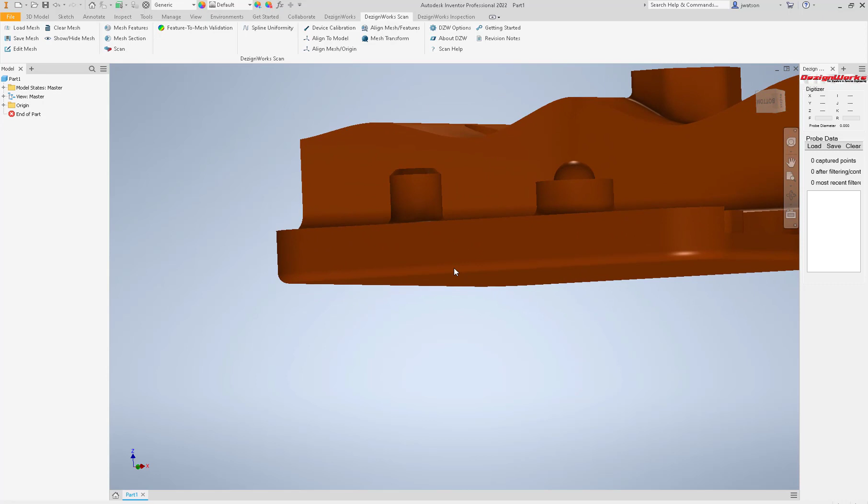So the first thing you're going to notice is this part has fillets, chamfers, all kinds of things on this part that normally makes the person's life miserable trying to create this with other products. They'll tell you to go back and just edit everything in the tree, add a plane. Well, our guys in our service bureau didn't like that, and neither did our customers, so we've added some new great tools.

So to get started, we're not going to talk about moving the origin or anything yet. We're just going to work on building a feature from this. To build this, you're going to do it the same way you would do it using Inventor sketch tools: you pick a plane, define a profile, extrude it, and so forth. We're going to do the same thing.

So we're going to go into Mesh Features. If this is the first time you've used your system, you may need to resize this, it may look something like this. So go ahead and resize this to cover your screen. You do not want to be utilizing Inventor underneath and DesignWorks at the same time.

You'll notice you can move this with the 3D mouse or your mouse. The middle button lets you rotate, left and right buttons on the mouse let you select. We highly suggest the 3Dconnexion SpaceMouse, it lets you turn and rotate it.

On the left side, you'll have a menu that you can put wherever you want. We just like it on the left, but you can put it anywhere. You'll notice at the beginning some tools, they look and feel like Inventor: plane, mid-plane, lofts. These are the kind of items you're going to create.

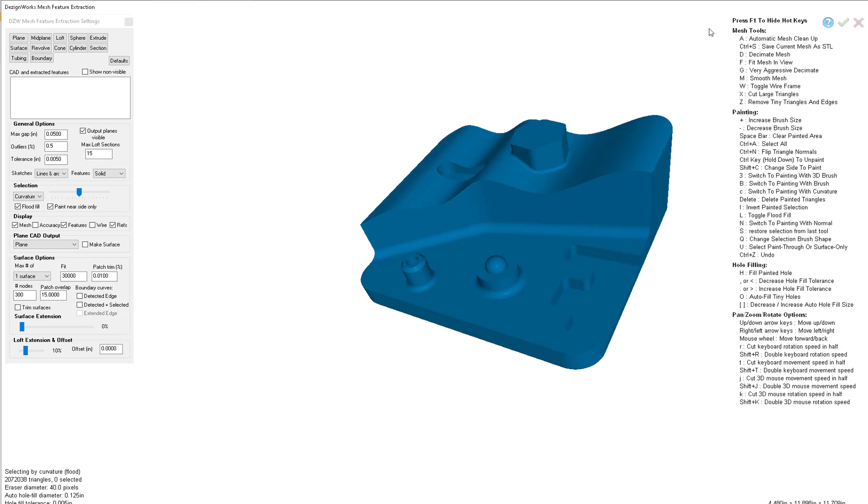So to get started, we want to constrain this. You'll see a lot of products out there just paint on the meshes and build it, nothing's constrained, horizontal, vertical, then you get in a tree and you have all of these nightmares. So let's first go back to the normal painting.

This slider controls how much it's going to paint. Normally you want to keep it somewhere in the middle.

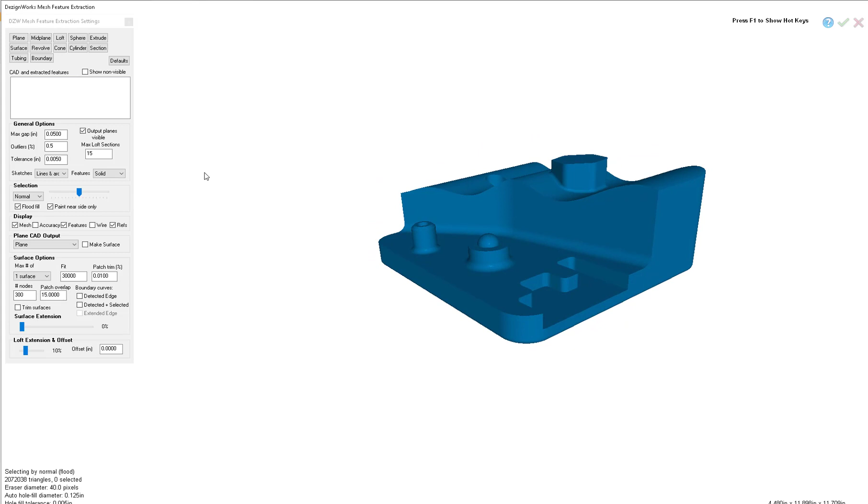So we want to define a plane on the bottom of this. I'm going to move the mouse over here, left click on it. And because the slider is about in the middle, it selected all of it. Notice it got right about to the horizon line. You don't want to paint over into that chamfer, it can confuse it. We're going to create a plane there.

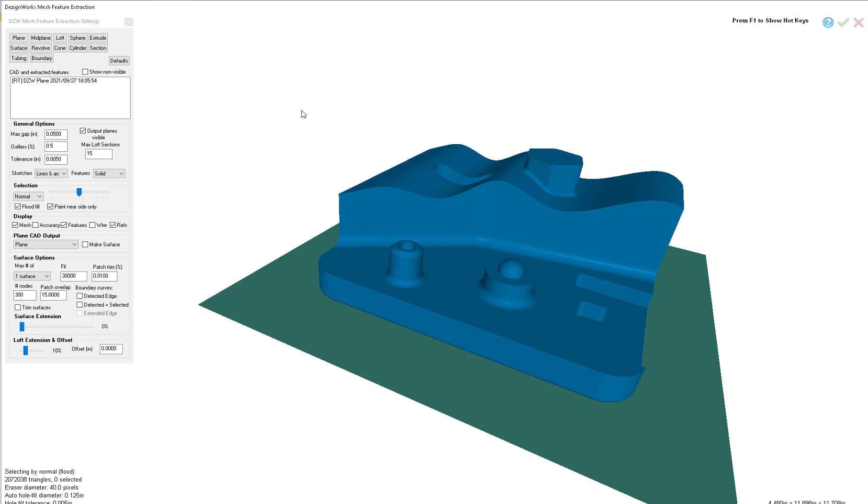Now there's another option for a plane to make a surface. We don't want that, so we're going to simply say make a plane. You'll notice in the tree, as you build, it's going to add things, and this little pop-up tells you what affects it. So now we have that plane.

Like you were in Inventor, we have to define this profile. So we're going to leave it on normal, kind of like left click. And if you want to drag it, hold left click and drag like this.

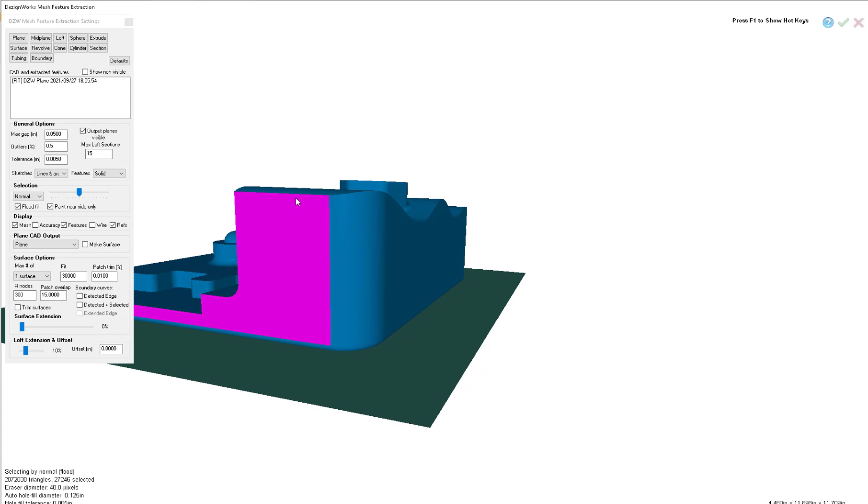Now for the extrude, it does need to be continuous, but it doesn't have to be painted the whole height. By painting this the whole height, this tells the extrude how high to go, but that can also be modified in our new extrude tool.

But let's pretend there was a casting and there were some irregularities in here. You could go to B for brush and use either the round, or hit the plus sign and make it bigger, negative makes it smaller. Or the Q key makes it into a cube.

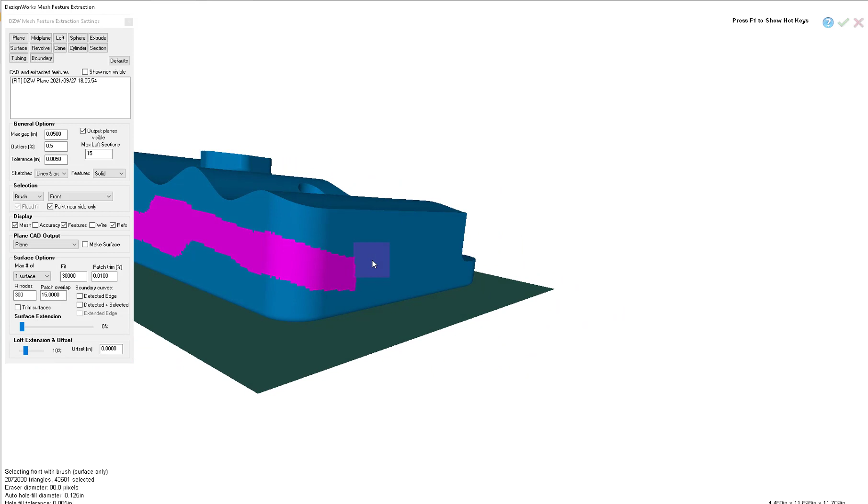Now you can paint on the front, back, and both. Normally, if you're learning, I'd say leave it on front. But let's say it had a bunch of impurities in this, you want to go around it. Say it was real jagged there, you can switch your painting style. And then when you got over here, you'd say, hey, this is all good. You could go back to N for normal, or pick it here, and go like this. So those painting options are very handy, because not every part you get is perfect.

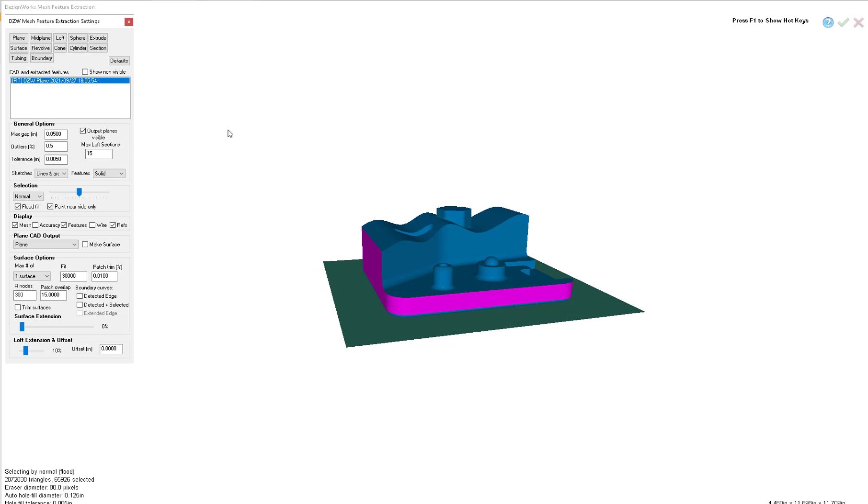So now that we have our sketch profile painted, we're going to select this constraint. We want this extrude to be perpendicular to the painted sides. So we're going to review, it's a solid. We've constrained it. Now currently, because it's painted to here, this is how high it will go.

But what if you need it to go a little bit higher when that loft kicks in? You could actually go back to like the brush, that's one of the easiest ways. B for brush, you might want to make it a little smaller. You could select, I want to go all the way to here.

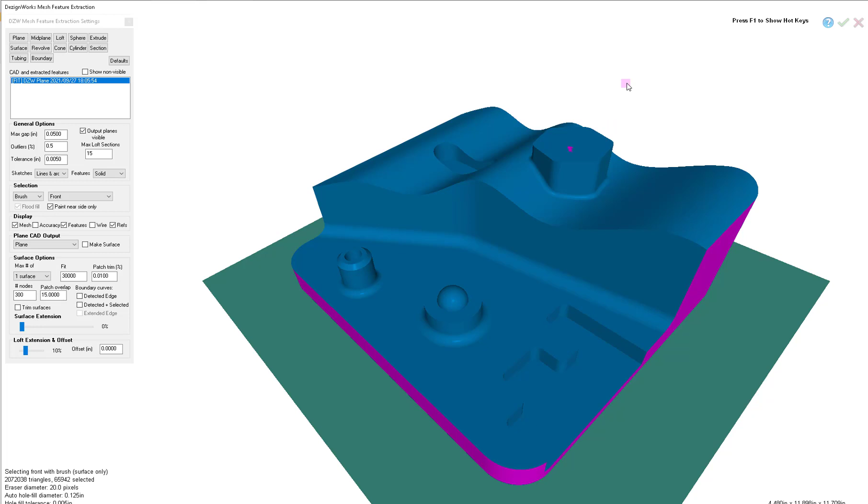Okay? This is something no other product in the world does. They make you edit it once you go back to the Inventor tree, and they make you make planes and edit up the surface and all this other stuff.

So now we can tell it, we have a plane constrained. We picked our top, and we want a solid. We're going to simply hit extrude. So it's going to process the data, and a new window is going to open up.

This is brand new for 2022, the in-process extrude window. This can be moved around wherever you want it. Now currently when it's up, you can't rotate the part, but you can make it smaller or bigger.

So currently it's saying, here's all your gap settings, lines and arcs. It allows you to in-process change this. Now look at this model, we assumed it was straight. During the integration it says it's got a draft. We don't want a draft.

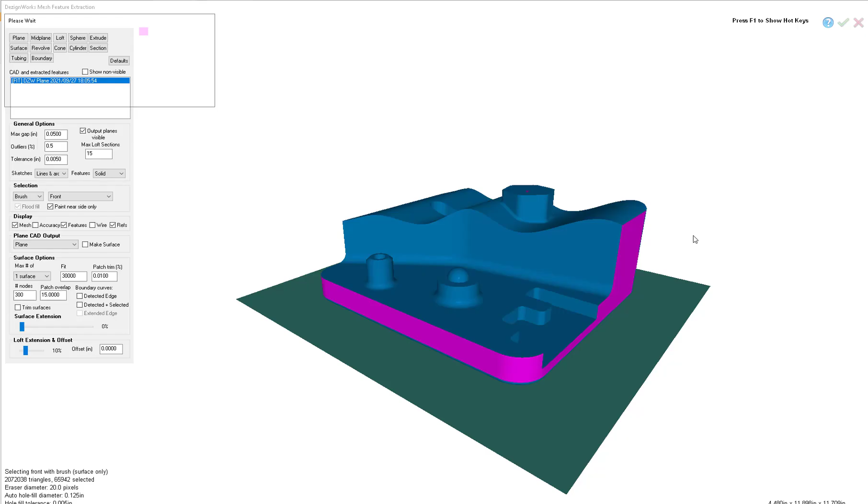Here's where all the other products make you go back to the tree and edit it. The red tells you the bottom, this tells you the top. And we can go ahead and say recompute. It's going to recompute because we told it we want a different draft. If you didn't want a different draft or anything, then you could just say accept.

But I changed the draft, it's now 0 and the sketch is closed. So this is a really great tool, it shows you 4 views and you can change the start point, end point, whatever. And we'll say accept.

So notice it shows you a preview. If you want, you turn on the accuracy analyzer, it'll check where we painted it. So this is holding really, really good. If we let that draft on there, it would have shown red. Now that the accuracy analyzer is on, you can check the whole part.

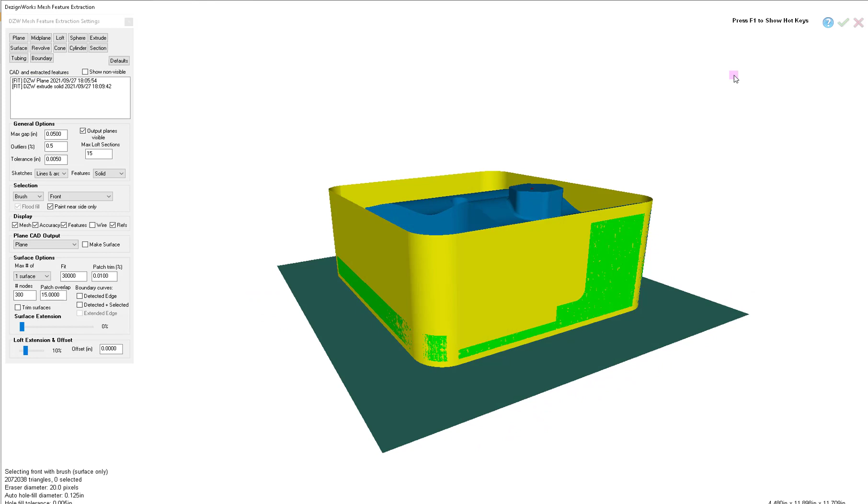I recommend turning this on and off. Now we'll hit the green checkbox. It'll write this back to Inventor, and you'll notice in the tree you have the extrude and the sketch.

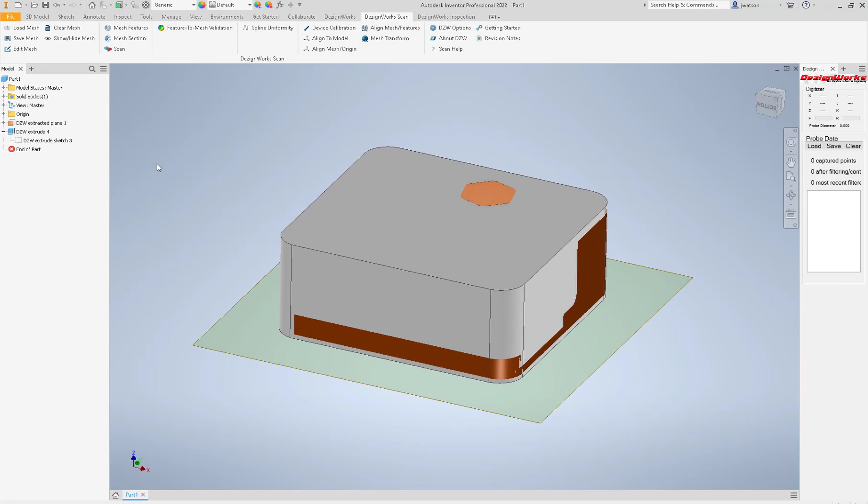The reason for that new extrude window is that all the other players out there make you pick a plane, pick up the surface, edit it. We don't want to do that. So let's say edit sketch - nothing's constrained, so you can come in here and actually change your model.

We could do a DezignWorks scan, show hide the mesh. Here's all your data - look how nice the lines and arcs are. With DezignWorks 2022, we spent a lot of time improving this.

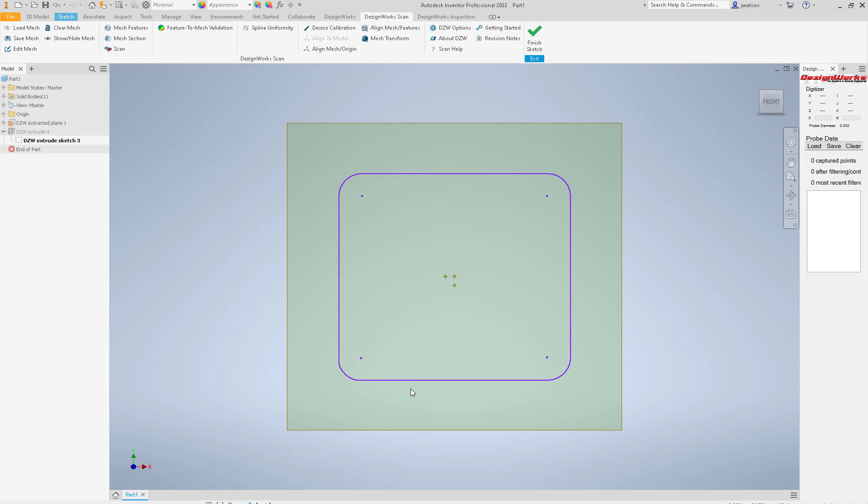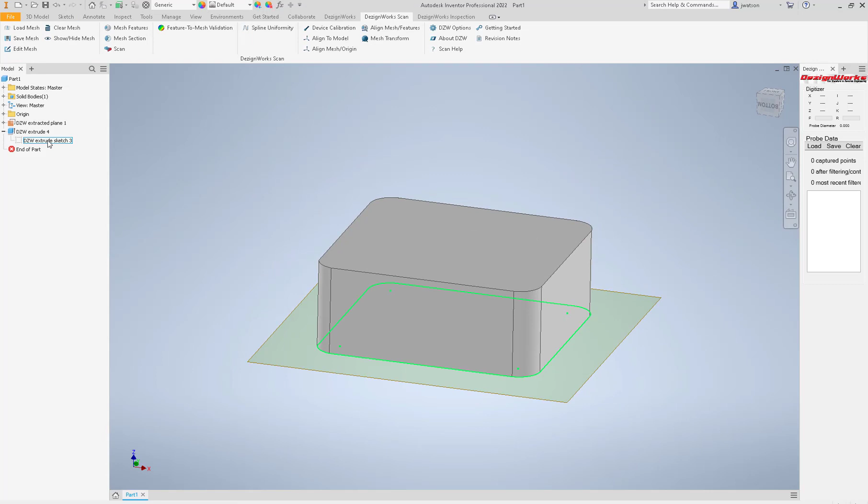All the other players out there make you go sketch on top of it - it's painful. So you can go up to 3D model and just go ahead up here now, or back to the sketch and dimension all this - your lines or arcs, whatever - or if you like it, just hit the check mark.

You can adjust anything in the tree, the height, sketch, whatever you want. Let's go back and start cutting away this. Let's go back into Mesh Features, and let's go ahead and do this wavy top.

Let's leave it on, it's actually on brush. This is what would happen if it was on brush - it'd go like this, so you can make it bigger. Do you really want to do that? It would take a lot of time to do this, and you'd probably bleed over the edges, which you don't want to do. The normal tool is really nice.

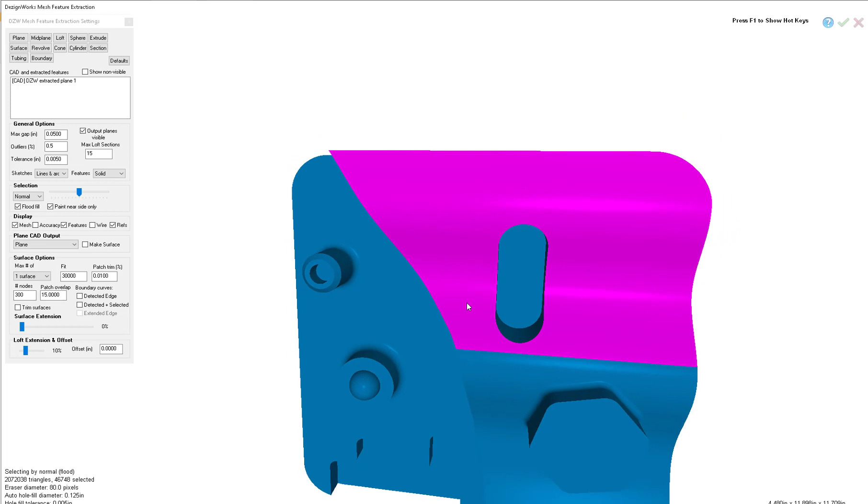You can hit normal or N. So watch what this does - it's adjusted here, it's about in the middle. It allows you to click and hold, so I'm holding on the left mouse button. It knows where like the horizon and edges are. So things you don't want to do is paint over the edge.

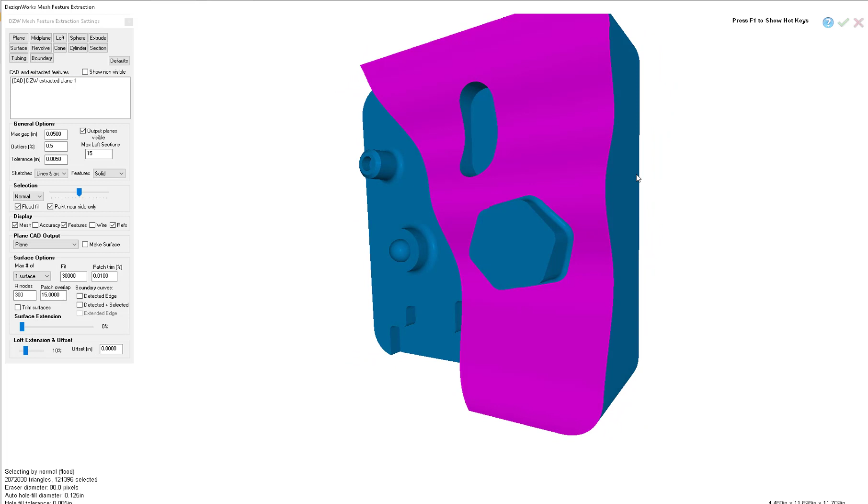Like here, you won't want to paint into that fillet. If you did, you can come back and erase it off with one of the other tools, but by using the normal tool it normally paints really nice. So here you can do some adjustment. If you want to make a plane here, and one of the cross sections running from right to left, you could do that, or make a plane here, going from top to bottom - whatever you want to do.

What controls this mainly is the loft. You can put as many cross sections as you want - by default it's set on 15. So let's just go ahead and say I want to do a loft.

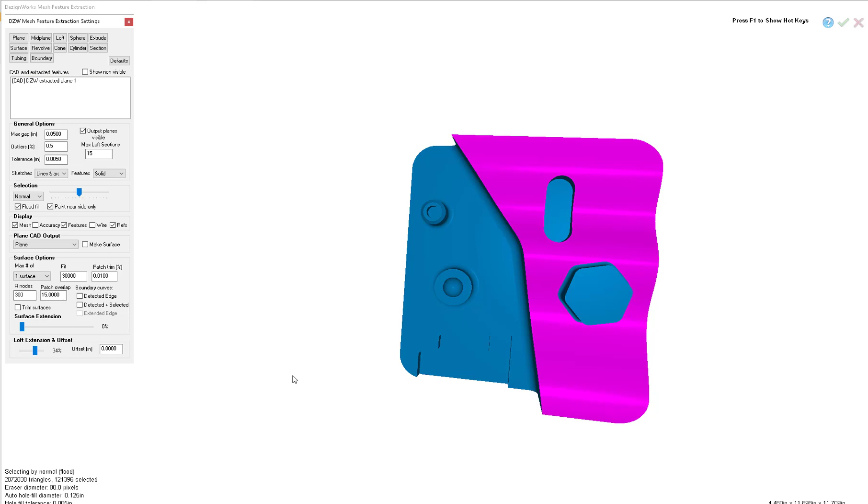Here's another issue - if we didn't extend this, we'd have to extend it in Inventor. So in DezignWorks under loft, we can extend this. Now it's doing the volume, so you don't have to put this up to 100%. You probably put it 25, 30, 40. It's looking at the volume of the part and saying, how far do you want to extend this loft?

Also new in 2022, you can offset that if you wanted to. So I'm going to take it up here, I don't know, 40%, and I'm going to leave that alone at 15 cross sections and say loft.

DezignWorks is very fast and efficient. It utilizes the GPU more than any other product on the market.

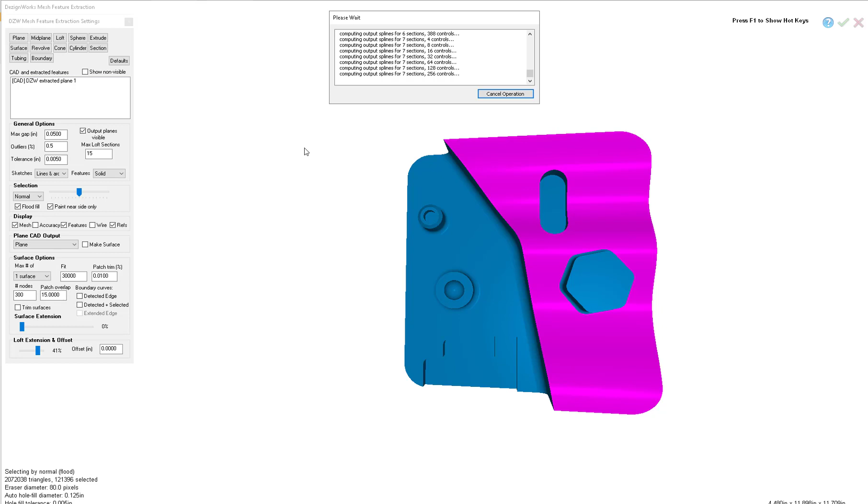If you need more cross sections, you can reload that mesh. We'll get into that a little bit later in some other training sessions, but since this is your first session, the key is not to overload you. So 15 sections should build this pretty accurate.

And we'll check with the accuracy analyzer. If you need less, use less. Some cases you might need 20, 25. Sometimes you have to run it and then just check it and see what you need. But most of our settings over here under general have been really beaten on and adapted to, so we didn't want you to have to come over here and constantly change these all the time. Nobody wants to work on flipping settings all over.

So this is about done, and all the cross sections are editable. No other product on the market lets you edit the lofts - they all show imported lines and you're stuck. We've really made this adapt to Autodesk Inventor so that you can edit almost any entity out there. So there it's done with the green checkbox.

There's your loft. Now there's many ways to trim this off. One of the easiest ways is to use the extrude tool.

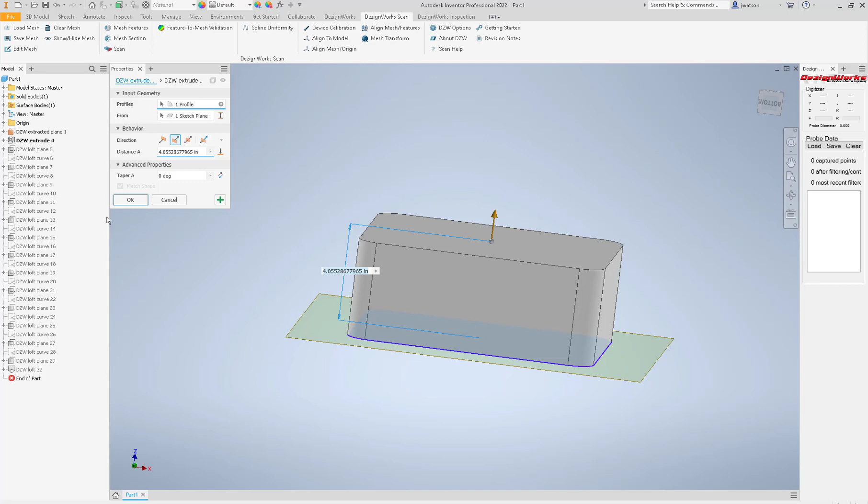So if you hit this and set edit feature, you want to realign this. In this case, you're like, what's wrong? Because it's parent-child, this is before all the loft. So if you do that, just hit cancel.

You can actually move this down to here, or do the loft first, however you want. Again, this all constrains to the parent-child relationships. Edit the feature.

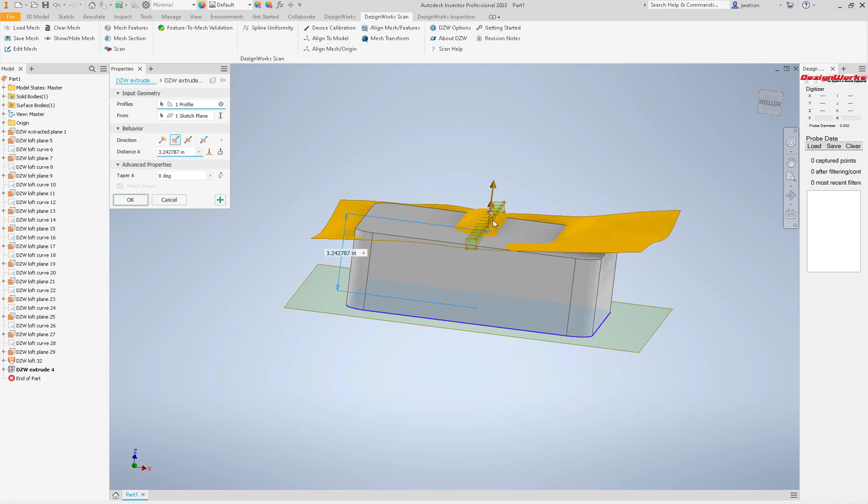Now with Inventor, you do have to pull this down below it. I don't know why, but you do. Then you can say To, and then pick this surface, it'll go up to it. If it's above it, it doesn't want to go down to it. Say OK. Then you can go ahead and actually hide this.

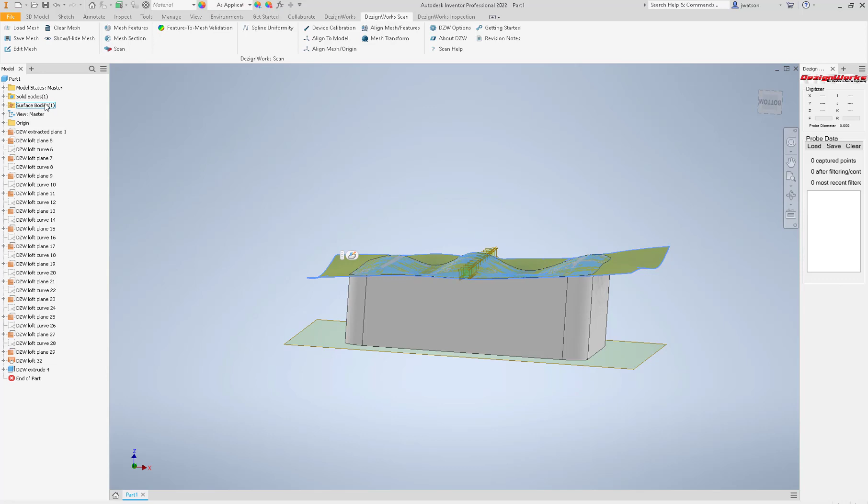So it would actually be up here in the surface body. You could hide it. You should occasionally save your part. File save. Let's go back and build some more features.

Don't forget about your thinking cap, the way you work in Inventor. You build everything the same way. Now, if you don't want to see all these references, you can turn them off.

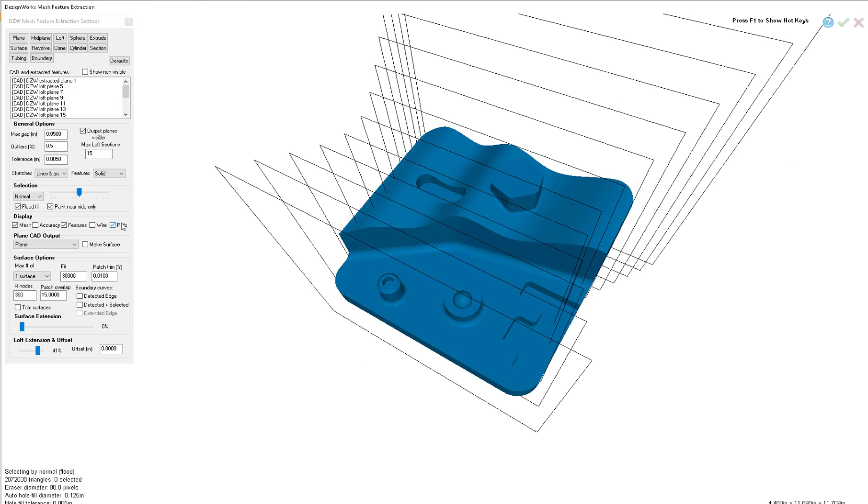Let's go ahead and cut this away from here. This is where the big problem comes for all of our competitors. They have trouble because it's fillet, and they have to pick a feature, and this is the fillet, and you got to edit the tree. That's why we have this new extrude tool.

So let's build a plane here. Again, we're on normal still. Build that plane. We want to constrain this, so let's paint on here.

But notice, it's painting here, it doesn't know how to get through the fillet. Oh, but it does. So when you get ready to build this, you can pick this plane. You'll see in the extrude window, it knows to start down here. So again, we save you all that time of saying, oh, it's short.

Go build another plane in the tree outside in Autodesk and do up to surface. We do it all for you here. So let's use the surface tool here, because we're actually going to delete this and just cut it off with Inventor. We're going to say surface extrude.

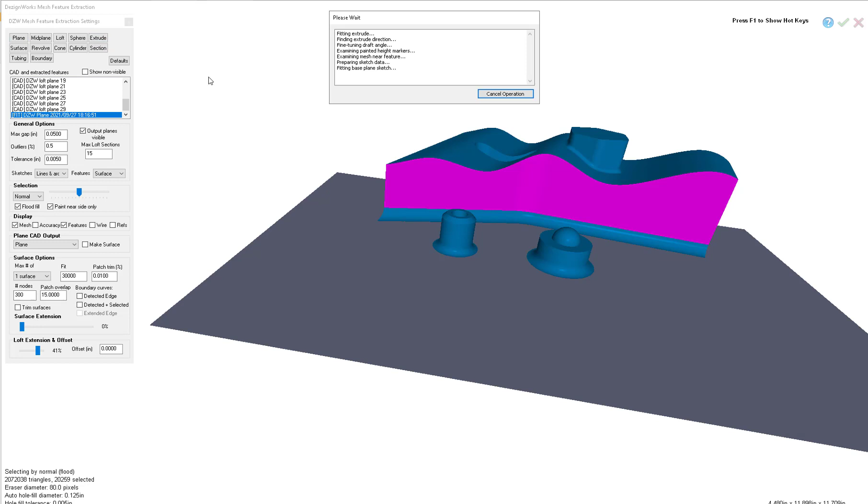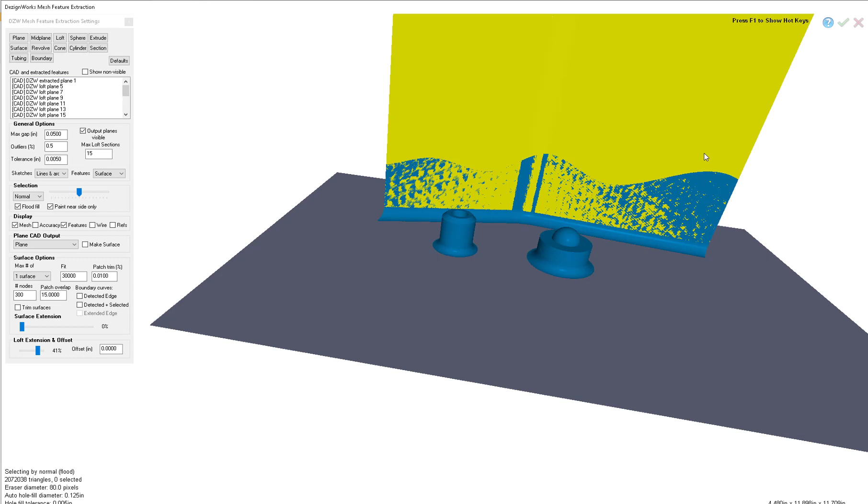It's not a closed profile, it's open. So here, what's really nice, this will actually start down there, but notice when we painted this, it might not be tall enough. So on the blue side, you could say through all and accept. It's going to make it taller. And then we'll go chop this off.

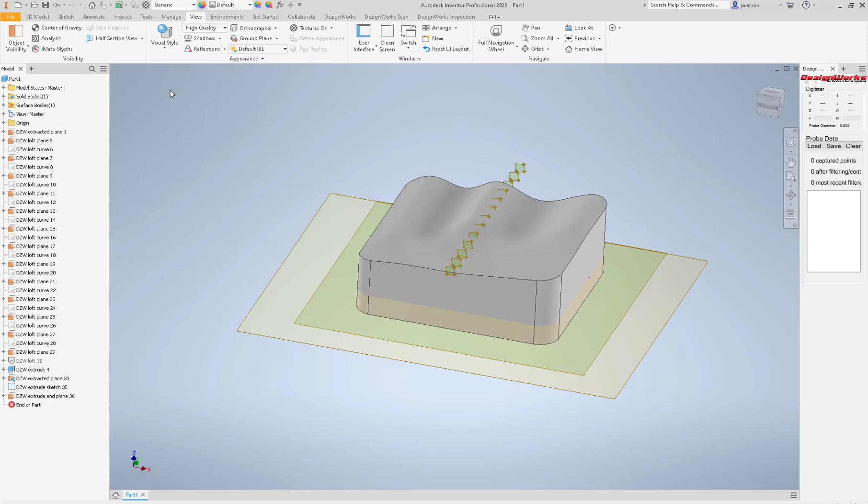So what it's saying is it's an open profile. Let's go take a look at it. We only need the surface of this. So in here, let's go to wireframe once. And we'll go to visual style. Let's go to wireframe, so in there's the sketch we need.

Sometimes they'll do that in Inventor because it's not a closed profile. So let's go in here once. Let's go to the sketch. So you'll see here's the plane, here's the sketch. Let's edit this sketch. We're going to make this closed and cut it off.

So go grab your normal tools and we'll trim it and close it. Right click, we'll go to trim, and we'll say extend this. So we'll extend this out to here.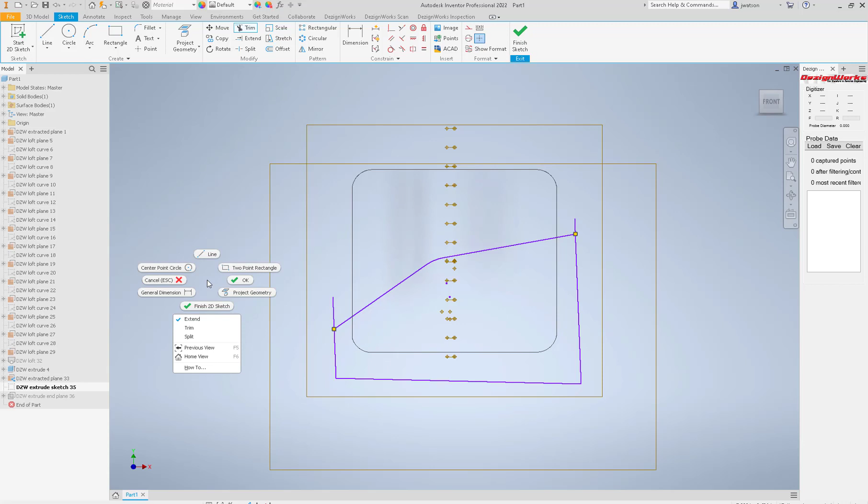Now we're going to turn our solid back on, our visual style. We'll do with the shaded with edges. Let's go ahead and cut that off. So we'll go up to the 3D model. We'll do an extrude.

Turn it so you can see a little bit. And you can drag this up or say through all, and we'll just say we want to do a cut. Let's save our part.

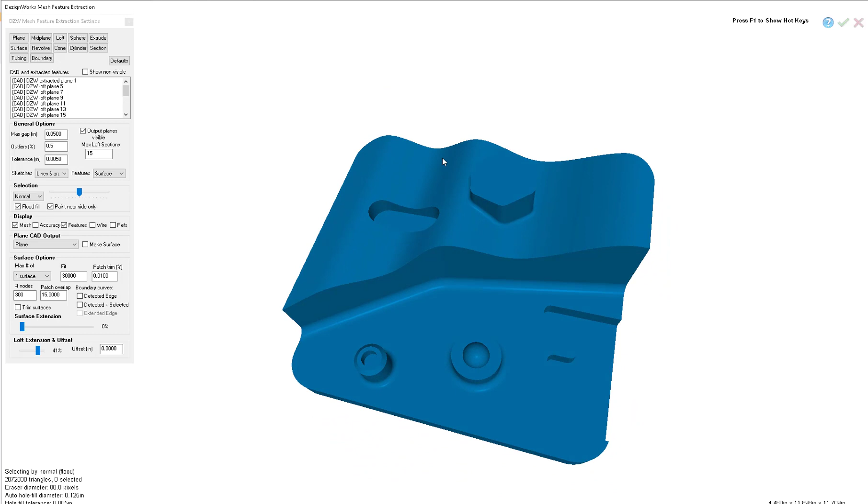Now let's go put some more features on this. Let's go back into the Pro Mesh and go into Mesh Features. So maybe you want to do this little boss up here. To ensure it's perpendicular, you could use the plane from the bottom, or you can use it as a reference.

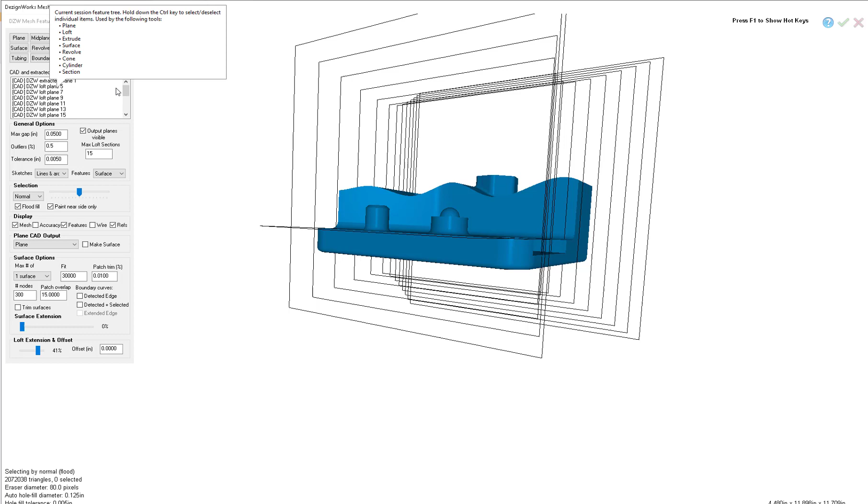So if you come and turn these on, the very first one we built was up in here. Okay, if you turn around, you see it's purple. So let's say you want the top plane you built normal to this.

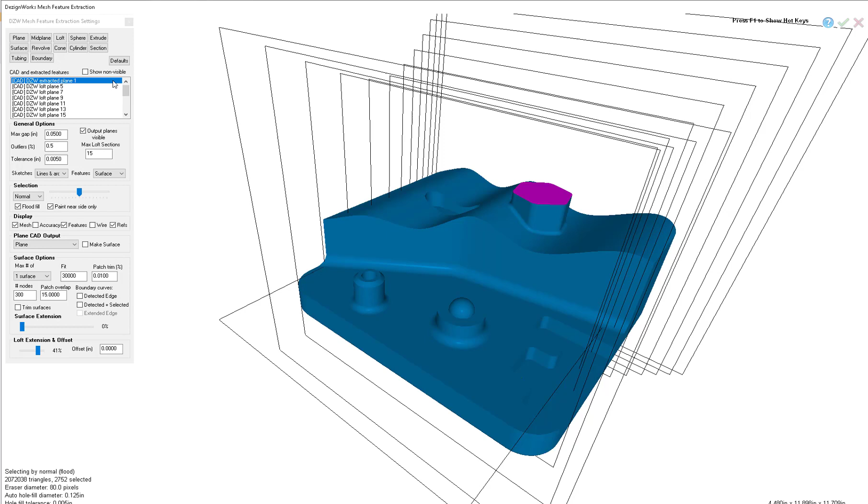So you can leave that highlighted. We could use normal, paint the top of this. When we say highlighted now, we can say let's build a plane that's going to be parallel to that bottom one. If we build it separate, they may not be parallel.

We can turn our features off. Now we can come in here, and if we don't want the references anymore, we can use our normal painting. We'll zoom in.

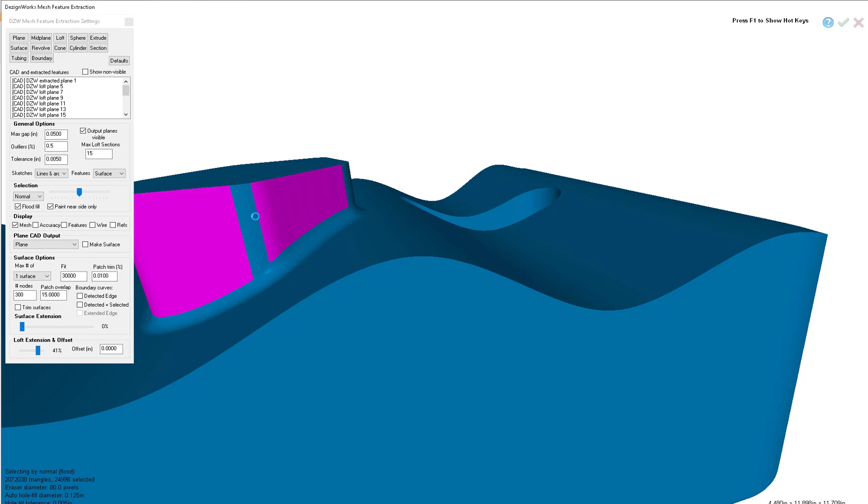When you do the extrude, it does need to be continuous. But notice how nice it paints this. It painted it right down to the fillet area. That fillet actually makes a big issue for all the other players out there. They can paint and make a feature, but guess what? It's short by that amount. They have to go in and edit the tree in Inventor and up to surface and all that crazy stuff.

So now if we go to the bottom of our tree, we can say that's our plane, that's our painted part, and we're going to do a solid. This is a tool here you'll turn on and you'll change the most. The rest of these you won't change much, and we'll say extrude. But again, it's short.

Okay, so what we can do is this: we can actually change it over here and make it actually longer. Notice the 4 views is telling you the red one starts up here. The blue one's not quite touching there. So what you could do is you could paint it or add something to it.

So if you want to go down inside of this, you could do that. You'll see the blue. What if you want to go down into this part more? You could say near the mesh start, near the end. In this case, I want to enter it manually, so it's 1.0685. We can actually put a value in there.

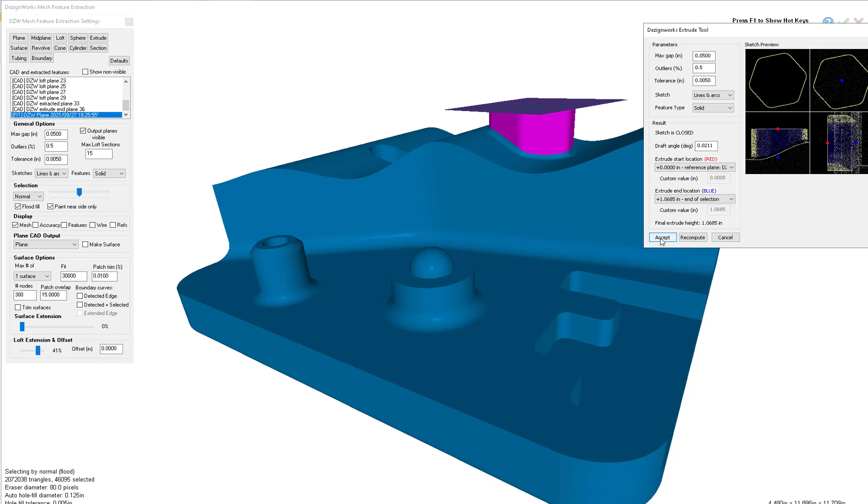Or we could have, when we built it, we could have painted this. So if we said, hey, we want to paint it, you could say cancel or recompute, but we could accept it. And we'll see our feature here. We'll turn it back on.

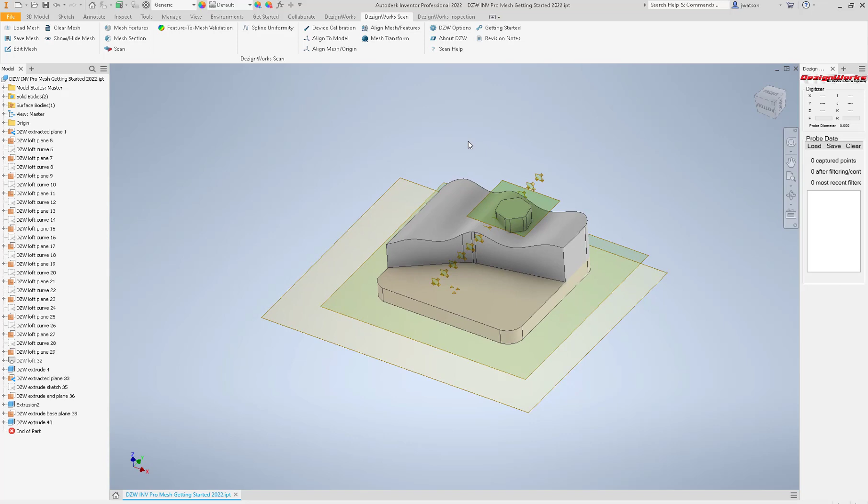We can also edit it. So let's show you just where the extrude's so nice. Let's build it. What you're going to notice is that it's short a little bit by the fillet.

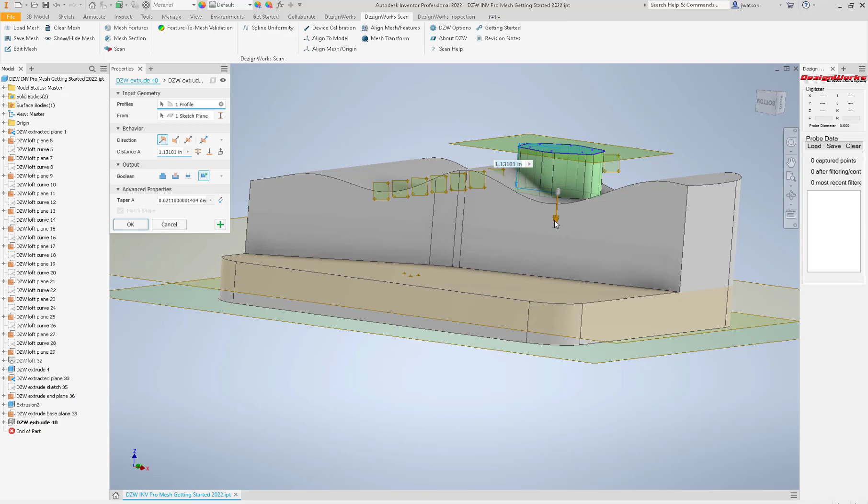That's what all the other players do. They're like, oh, just go edit and drag it. What if you had 50 of these? Just to show you, I didn't make it longer. But what if you had 50 features? Do you want to edit feature here and drag all this stuff down all the time into it? We didn't. So that's why we made it so you could do it in the other window. That was just to show you an example that would be short if you didn't do that.

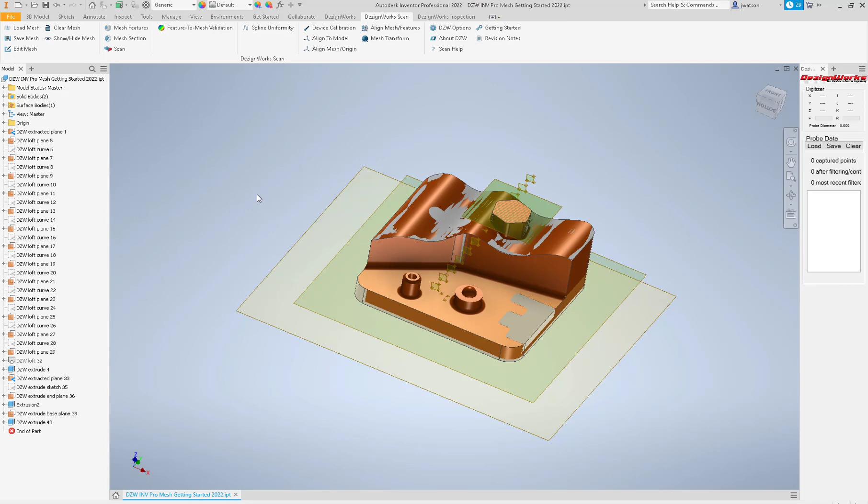Now we're going to build the features on this lower section. So we're going to turn the mesh back on, show hide mesh. We're going to go back into the mesh features. So we got these 2 features we want to build.

This is a simple cylinder extrude, which works similar to the extrude up here. So let's go talk about this. The revolve tool does not have the new feature to extend it like the extrude. It's something we're still working on. So we're going to do revolve, and then you would edit the feature in the tree afterwards.

So let's go ahead and make a constraint. So if we want to turn these back on, we could show them. In this case, we want to make a plane. We could use this plane or make a plane on top. This depends. So let's say you want to make a plane on top that's constrained to this first original one.

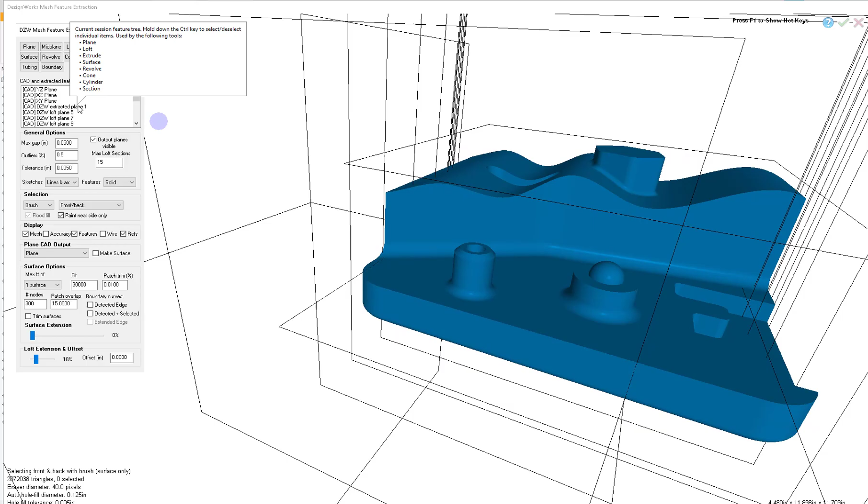I believe it was this one. If you select this, these will highlight different colors. So yeah, there's the one we first started with. So if we want to make this plane here, we could switch this to normal painting. Since this is highlighted, we can go ahead and make sure it's parallel to this one.

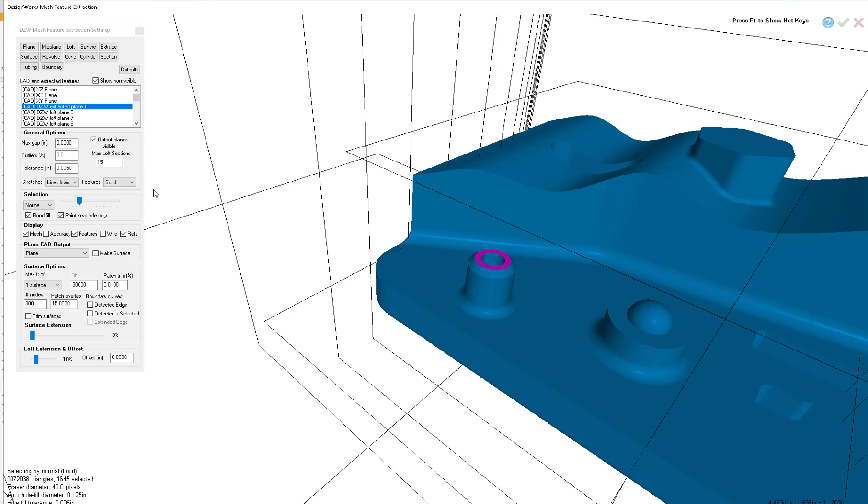We could say create a plane. Just make sure somebody else hasn't used your system and make a surface plane isn't checked. So we're going to say make a plane. So now we have a plane that's parallel to the bottom. What we want to do is paint this to do the revolve. So we could turn those references off and features off for a minute.

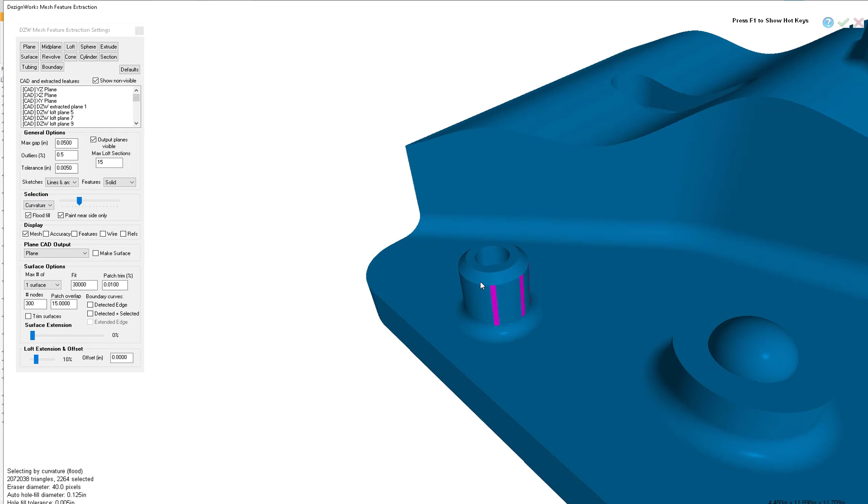Come in here with either the normal painting. You just want to watch - you do not want to paint the fillet, or you'll try to get the fillet in there. So you could switch it by selecting curvature, or C for the hotkey, and it'll kind of paint this. So if you're going to use the revolve tool, make sure you do paint inside here some. You do not have to paint it contiguously, but just enough it knows to go across it.

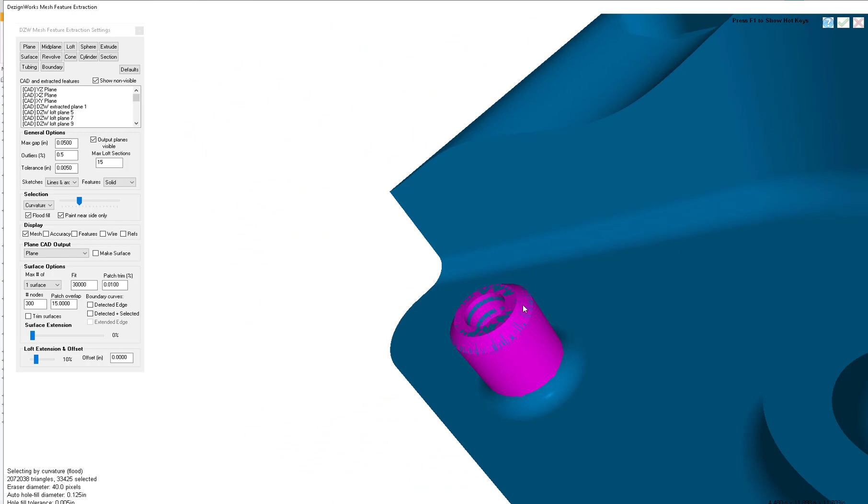Because what it's doing, it's mimicking a revolve, that actually looks pretty good. We'll spin it around here.

Looks decent. So we want to use our constraint. We want the revolve axis to be around this plane, and then we'll say we want a solid revolve.

Again, this tool doesn't have the auto extend pop-up. We can turn the features back on and check it. Something we're looking at, and we'll write this out to Inventor. So you'll notice this is the case we showed you about before with the extrude up here. We'll do a hide show.

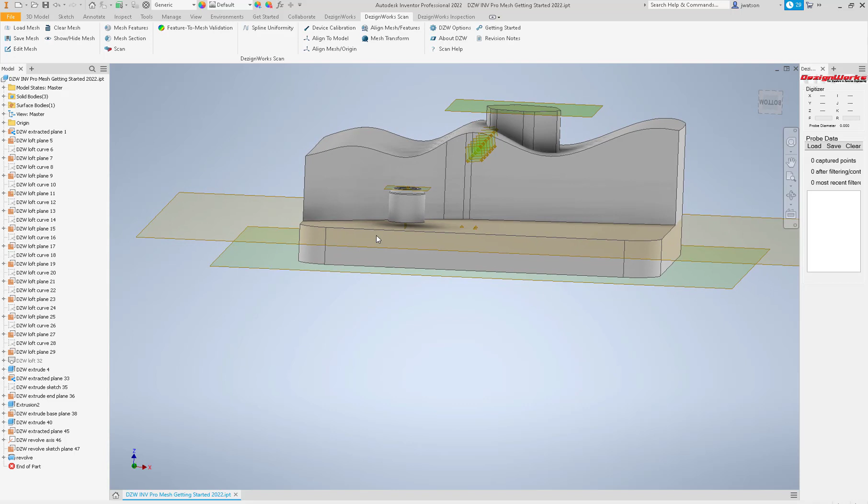Your feature's short because you can't identify it. But you can go in here to the revolve until we come up with a way to do this a little bit different. We can edit the sketch.

In this case, I would just go ahead and make one of these vertical lines fixed. So you can come up here and say fixed. Make sure to turn this off.

And then you could pull this down. Okay, that was turned off. And then you could pull this down. So you can cancel constraint.

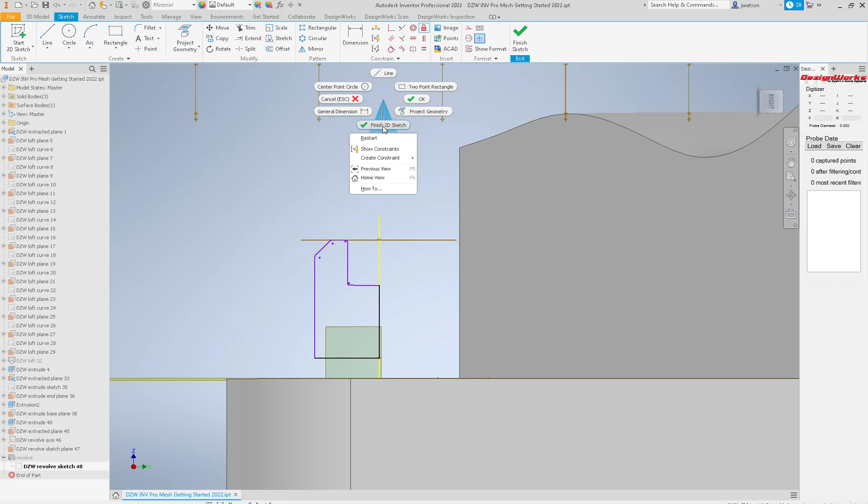Here's two ways to do this: finish the sketch and come back in, or cancel it in the sketch. These do not stay modal, but you want it off.

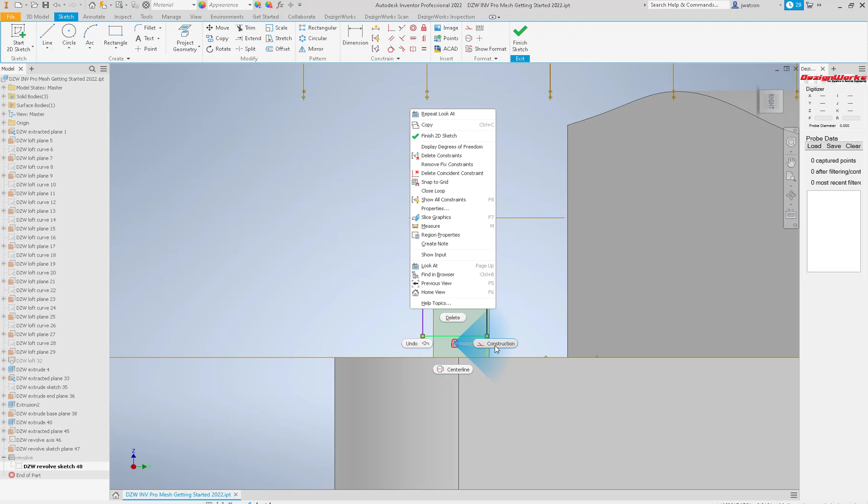So we pull that down, or you can cancel this. Or you can say, if you make a mistake, right click, you can say remove fixed constraint.

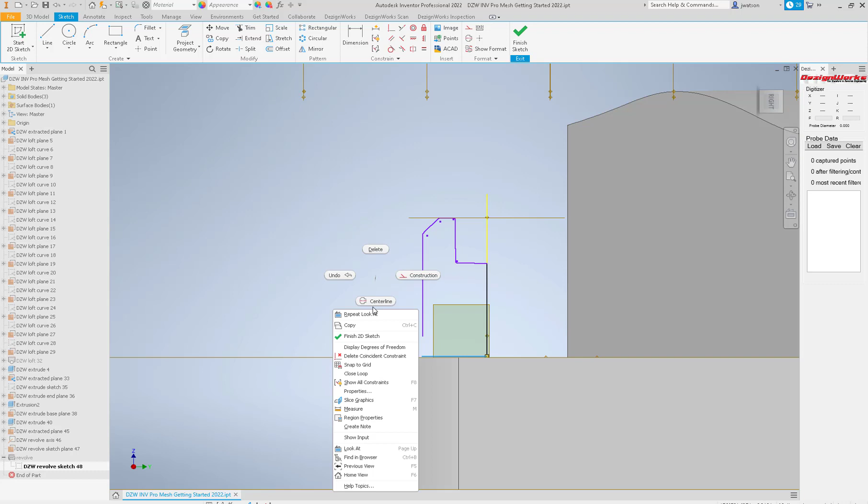Now you should be able to pull this down. Just make sure this isn't selected. You may have to trim this as well. We're in the sketch, so you may have to trim it or extend it.

Then you exit the sketch. Your revolve should be correct. But notice when we did the extrude, we did all that for you. We just haven't found a way to do this yet.

So let's turn on some features. Here you could do this two different ways. I would do the cylinder, which does allow the extrude tool to let you pick it down to here.

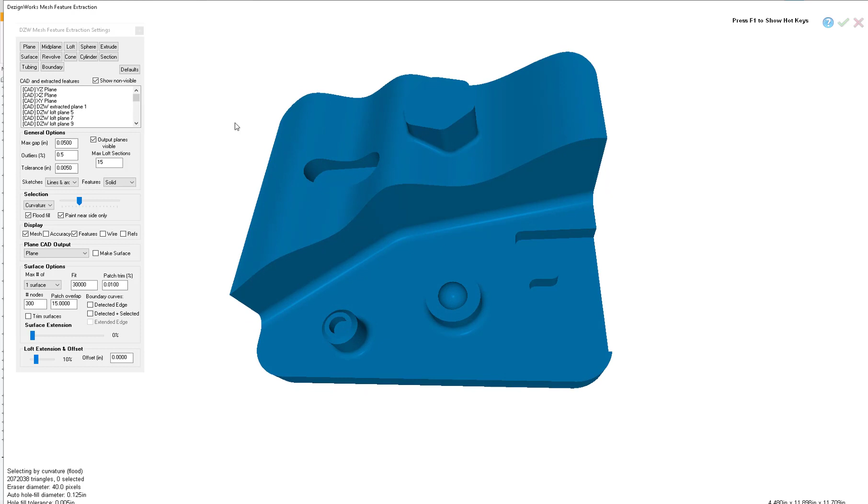So again, we can constrain it by one of these if we want. Or let's say you didn't want to constrain it. Go into Mesh Features for whatever reason. We're just trying to show you all different ways in this getting started. Again, I would just paint on it.

Now when you paint on it, there's curvature. There we painted on the top. So you hit the space bar, or you could go back to normal.

So if we're doing the cylinder, you don't have to paint it all the way around or continuous. It uses the painted height to get the feature size. But the cylinder does use the extrude command.

So we can tell it to go down to this plane. So let's say solid cylinder.

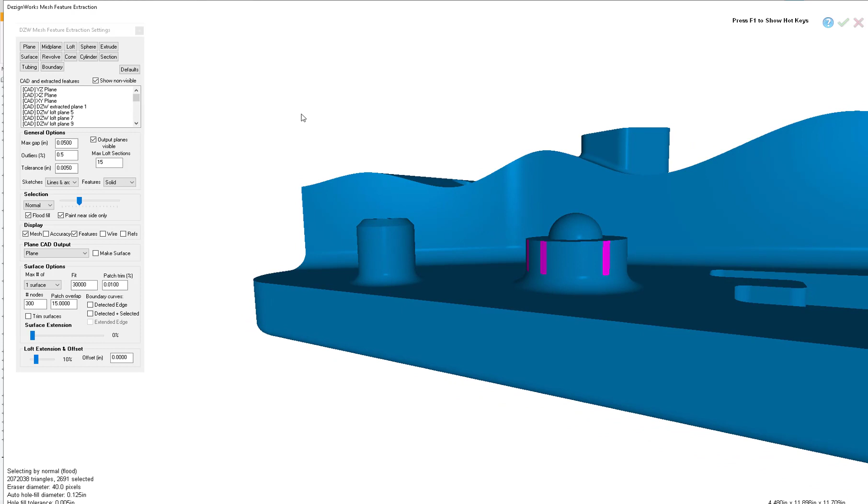So notice, this does use the constraint, and it's shown it's short. So this is where you could give it a value or give it a constraint.

So let's just show you. Let's say you forgot to pick the plane. You can go in here and where it shows where it's starting and ending, you could change it right here.

So if you see the red says the starting point is up the top, and this says 0.496. You could do this on the blue and change it. Enter value manually, whatever you want to put it.

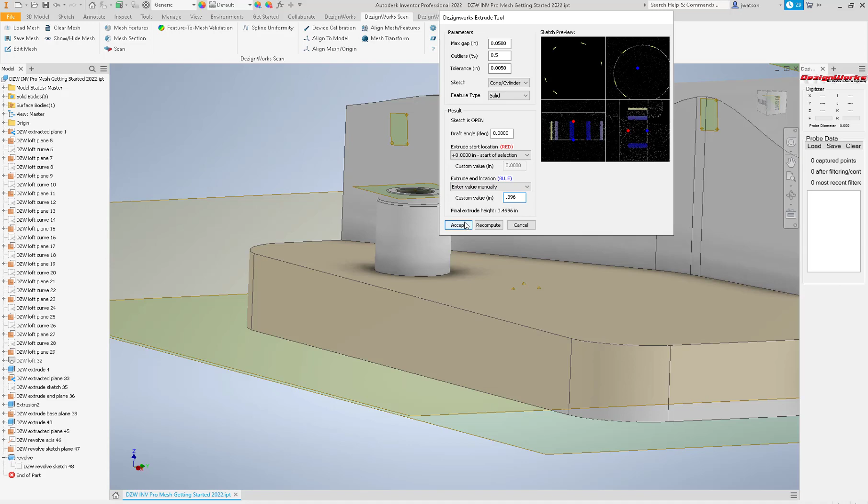Let's say you wanted it like 0.396. Hit recompute whenever you change it, and accept your value.

Then you can set it back to Inventor and say show hide mesh.

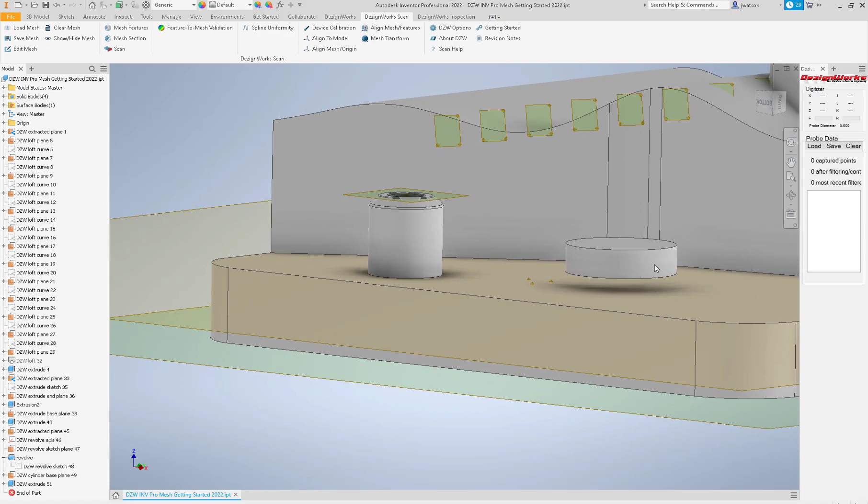Now again, I went the wrong way, but if you wanted to, with Inventor, you could edit the feature. This is what we don't want you to do, but just showing if you do make a mistake, you can edit the extrude, edit feature,

and you can pull it down. You can say other direction over here, or both ways, really however you want to do it.

In the event you say you forgot, you can pull that down. Say okay.

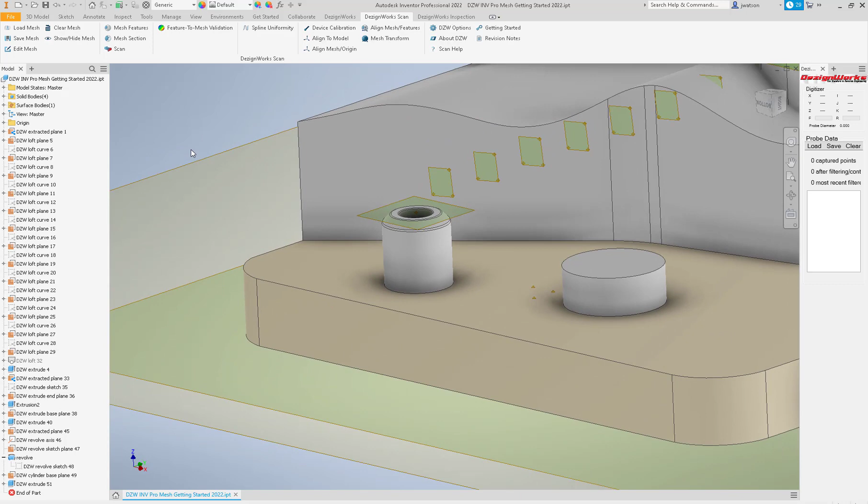So again, there's many ways to do this, but the new extrude tool saves you time doing all that. We should have made a constraint plane there, but just want to show you how different things work.

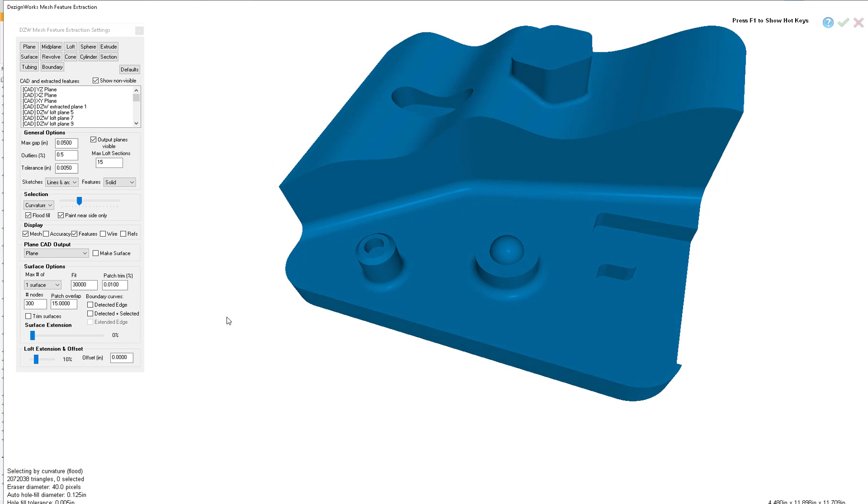Then we'll go in here back to mesh features again. If you want to do this for a sphere, you could use your C tool for curvature, paint this, and say I want a solid sphere.

So these are your creation tools over here.

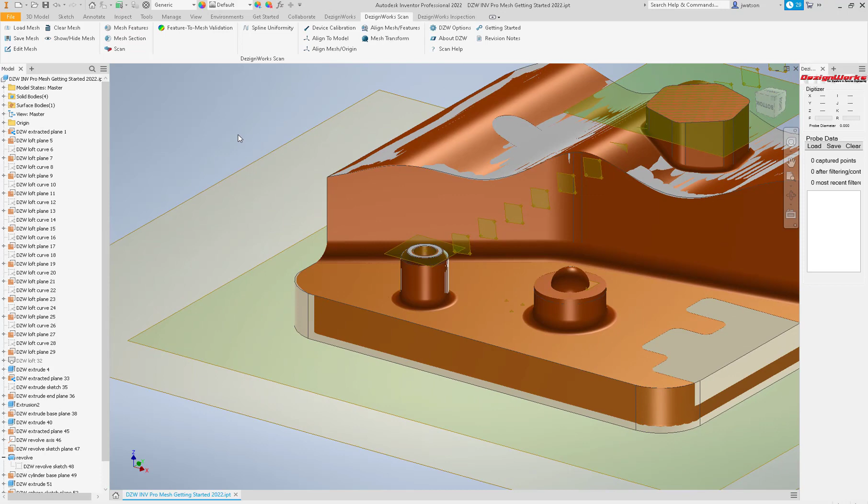And then we'll do this little cutout. Go back in mesh features. Here's where I would make a plane. So we'll change it, we're on curvature.

Let's go back to N for normal. Make a plane. Then we'll use our normal painting. We'll drag it along here.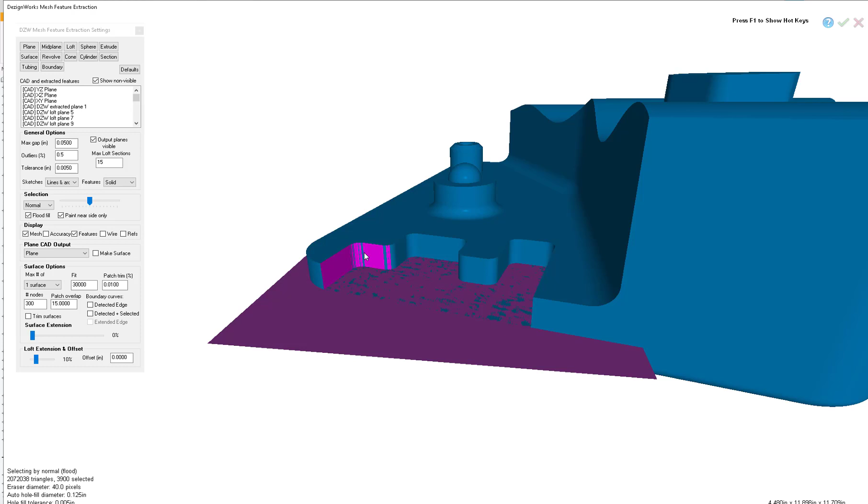For the extrude, this does need to be continuous. Okay, don't leave a gap here. Now, if you started painting it like this, that's the height.

And if you want to go back and maybe use the brush, whether it's a curvature, the round or the cube or the square, you can do this. But it does have to be continuous. So only one section needs to show the height, but just make sure it's continuous.

We showed you an example before where maybe there was a bad spot in it. You could actually come down here and go around it, back up, as long as it's continuous.

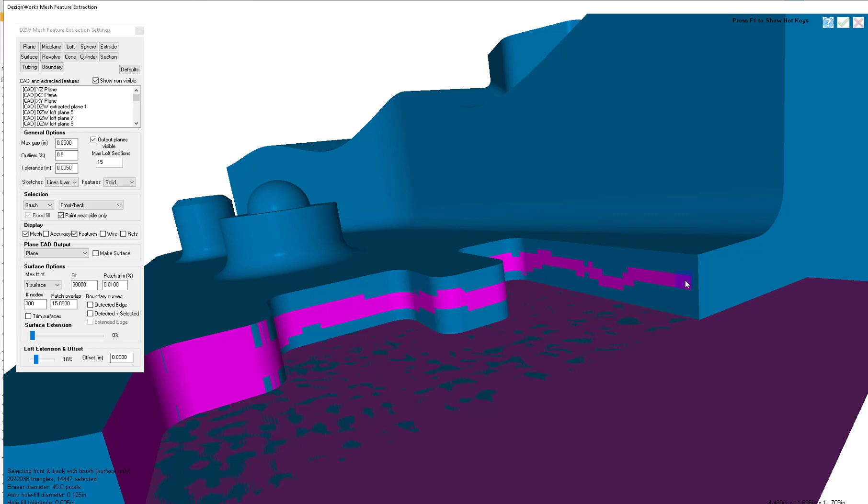So to build the feature, we'll tell it to constrain it. That's the constraint plane, the last one we built. Here you could do any of these because we have to edit it. This is an open profile, so you probably wouldn't say solid. You'd say surface or cut, but we're still going to have to edit this to make a closed boundary.

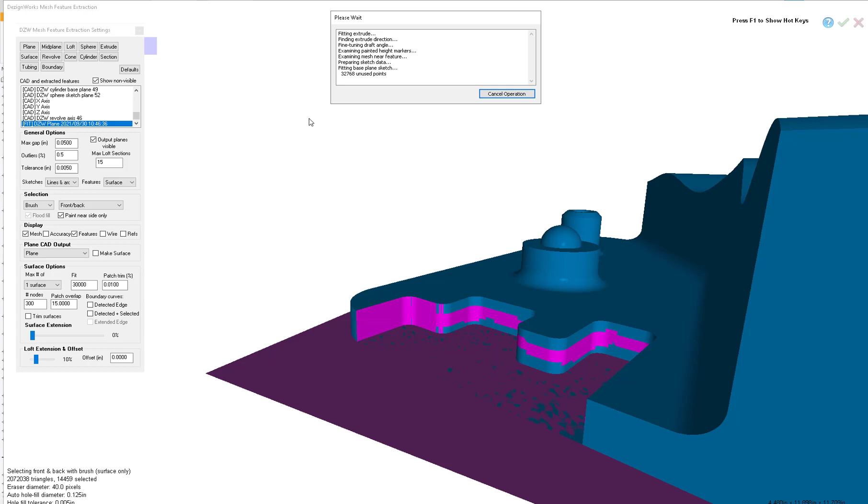We haven't figured out a way to auto close this yet, so you could simply say surface or cut, either one works. Surface, extrude, and it's going to give us that profile. Then we'll edit the sketch in the Inventor tree and close it.

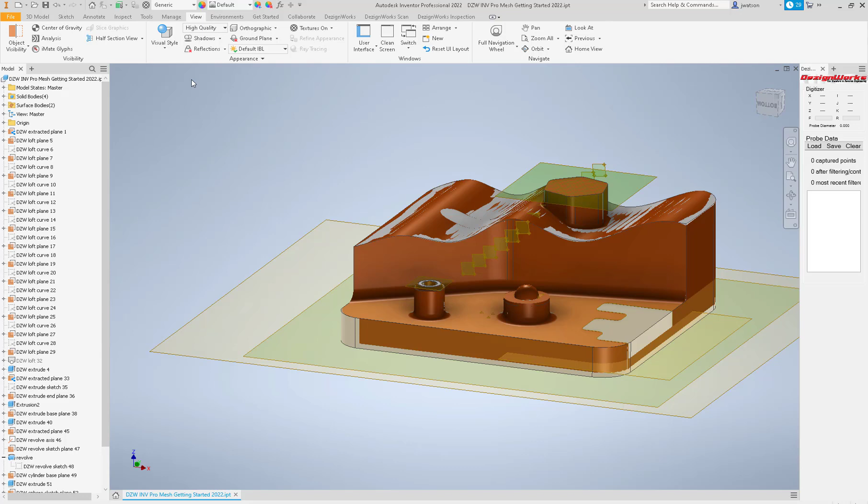Green checkbox. So we'll go in here and turn on our view. We'll go to wireframe, and we'll turn the DezignWorks scan mesh show/hide off. And there's our sketch. So we'll go down here and edit our sketch.

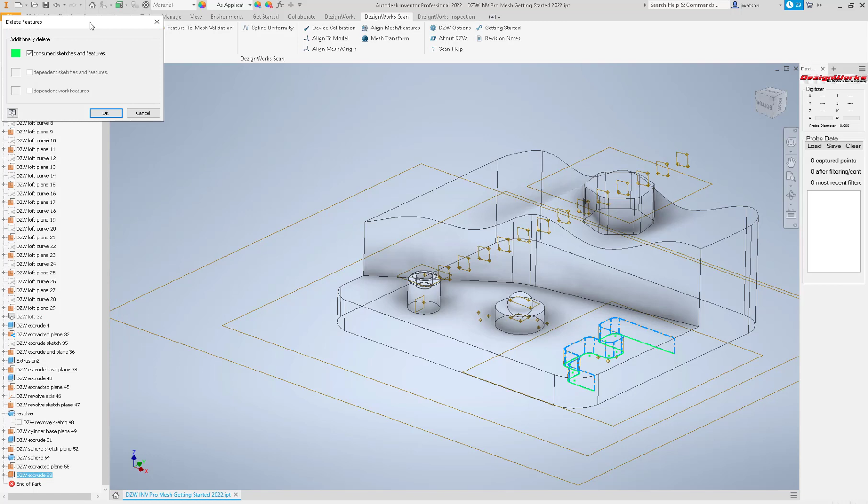You can actually delete the extrude, just make sure if you delete it, you don't delete the consumed sketches, because that's what we want. So now we can come over here and make this longer. Since you're in a sketch, you can use all the sketch tools.

And extend that. So again, we'll go into the sketch. I wasn't in it. Okay, let's jump into that sketch. Now we're in the sketch. You can use all the line tools, just draw something over here. And you can use the extend tool to extend it and trim it off.

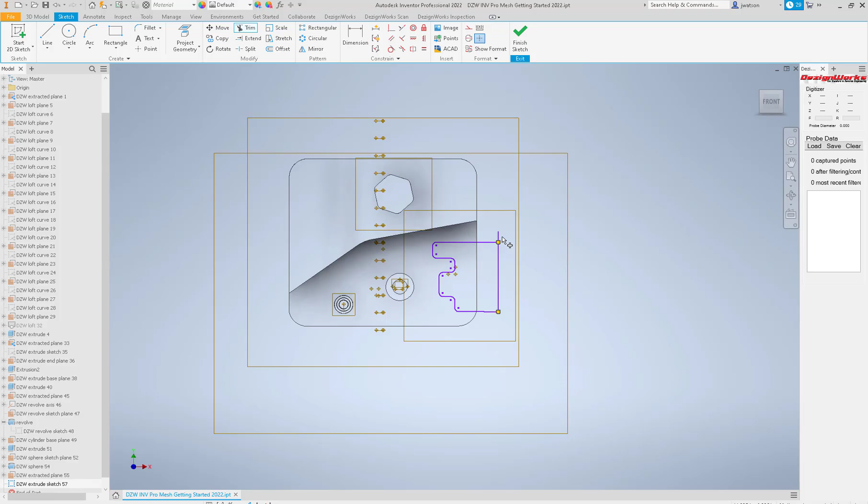Now we're going to simply use the Inventor tool to cut this out. So we'll rotate this around. And because we have it on wireframe, you have to do a little extra step. We'll say extrude, it knows the profile but doesn't seem to know the solid, so you select solid if you're going to do a cut.

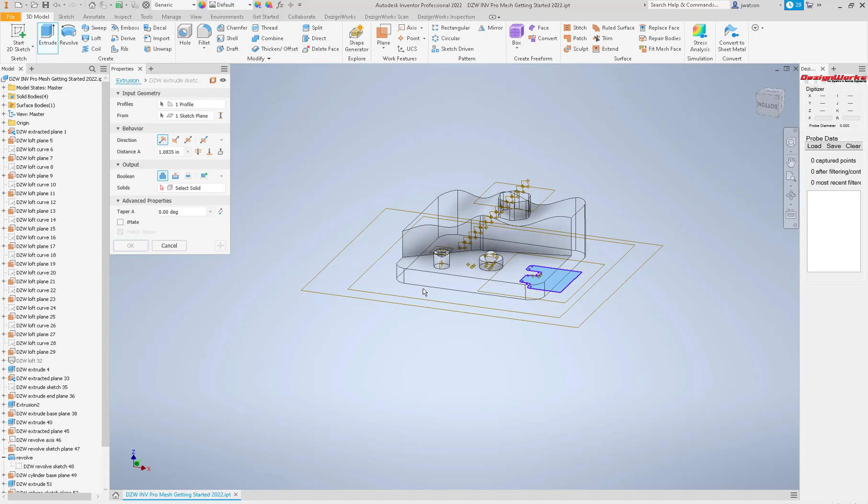Select solid, and then you can cut it. But if you don't pick select solid, it won't cut it out. Say okay, so there you've got most of your model done.

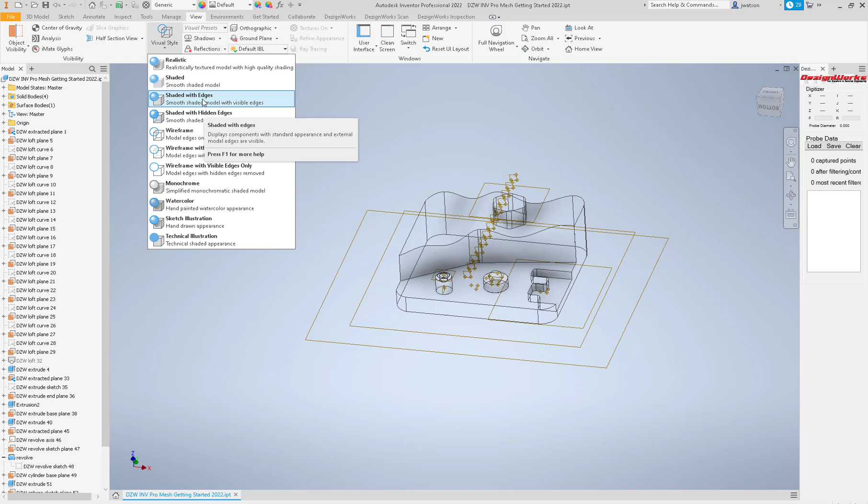We're going to see a new feature in DezignWorks 2022. We need to put these fillets in here, but we don't know what they are. So let's go turn on the visual style. There's your model. And let's go into DezignWorks.

If you're using Pro Mesh, that will say Pro Mesh. And we'll say show/hide mesh. So normally you're going to do feature to mesh to actually inspect it. We're going to do a feature to mesh and not select anything, or say visualize errors. This is going to let us mouse over and find out what these fillets and things are.

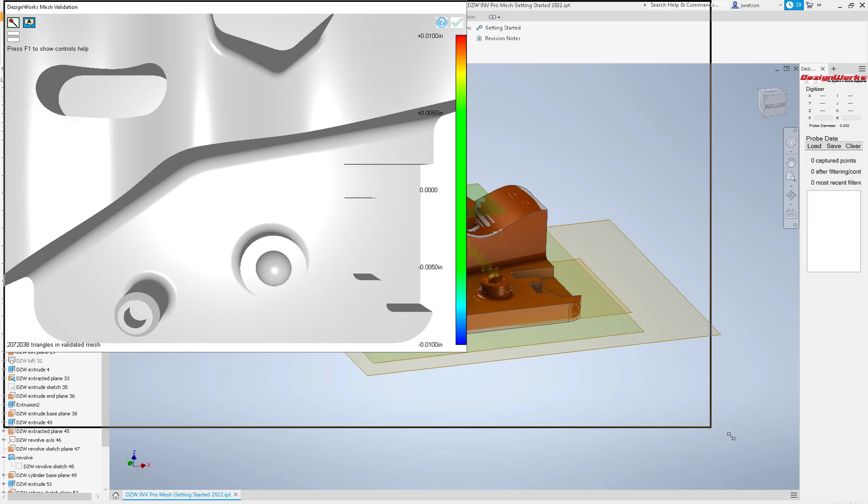Brand new tool. Again, if this is the first time you used it, you will have to slide this and make it bigger. So zoom in, take your mouse and hover over the fillets, and it'll give you a reference, 373. We're probably really at 375, but you could do it here too. Zoom in, because if you zoomed out too far, it doesn't seem to want to pick it up.

499. So again, we know that's a 373. You could do a print screen and save all of them. So go back to Inventor, and if you want to turn the mesh on or off, you can. I'm going to save my part.

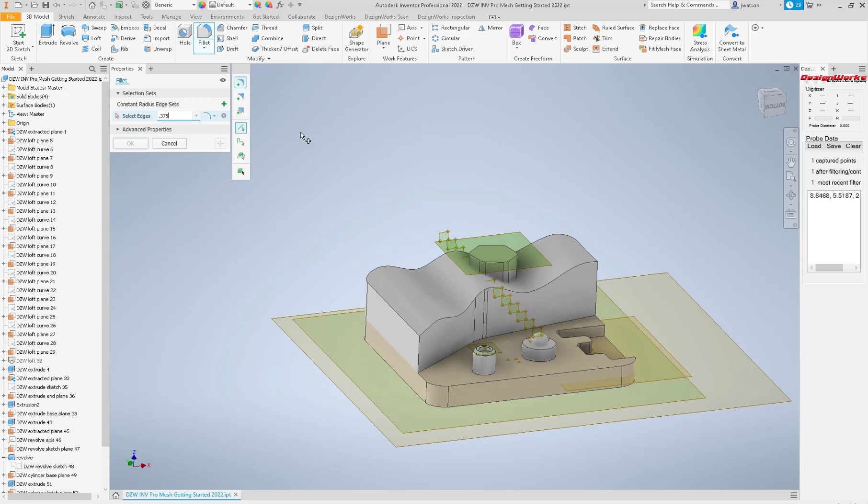So then you'd use the normal Autodesk Inventor fillet tool, and you put in your amount. In this case, it said 373, so let's do 0.375. And you can select the area you want, and go put it in here, pick that little radius down there.

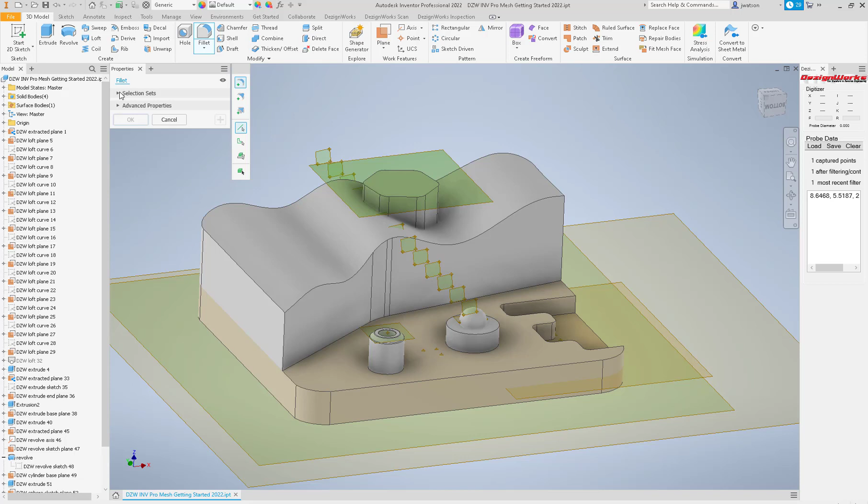If you do it the wrong way, you can back out, cancel, or you should be able to do a chain. So again, it's the normal fillet tool you use every day, and I believe they have a chain as well. You can go fillet everything, but again, it's the normal fillet tool in Inventor, so you could do all the rest of these the same way.